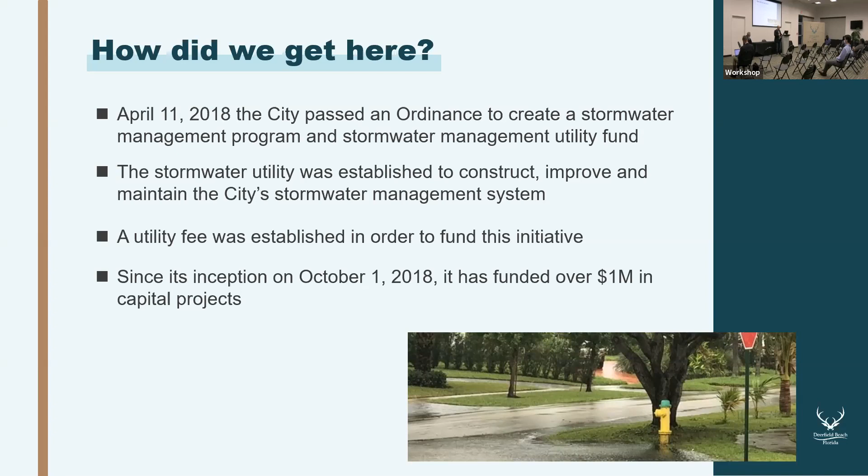The aging infrastructure in Deerfield Beach is not unique. Most of our communities were built 50, 60, 70 years ago, and a lot of that infrastructure is past its lifetime. There's a lot of deferred maintenance out there across South Florida, across the country we hear about. Ultimately, by creating this utility, by creating this plan, it's really a positive step forward for this community in addressing the challenges of making sure the streets and homes are as dry as possible. Since the inception of the fund, there's been over $1 million in capital projects.

So why do you need a plan to begin with?

Well, it's a little like, I guess for those of us who used to print out maps, right? Printing out a map and taking it with you. So ultimately you want to make sure you understand where you want to go as a city. You don't want to build one project that solves one problem when you could potentially build a bigger project that solves multiple problems.

This is one of the benefits of doing this planning process, that we can think through what is the best value for the city and its residents in terms of reducing flooding on roadways and ultimately making sure homes and businesses don't flood.

We talked about the aged and diminished capacity of the system. There are pipes that are smaller than we would hope they would be, and some pipes that are a little older than they ought to be. Ultimately, we want to make sure public health, safety, and welfare are protected, that people are not flooding. This is of utmost importance for the city.

Ultimately, the city is what's called a co-permittee on an MS4 permit. It's a regulatory permit provided by the Department of Environmental Protection under the Clean Water Act, and it allows the city to discharge water from rain in the stormwater system out to our water systems like the Intracoastal and the ocean. So we want to make sure that water is as clean as possible.

That's actually one of the biggest challenges. We'll talk a lot about this. Yes, we talk a lot about flooding, but we're going to talk about water quality as well, because the water quality portions can actually be more complex than solving the flooding issues.

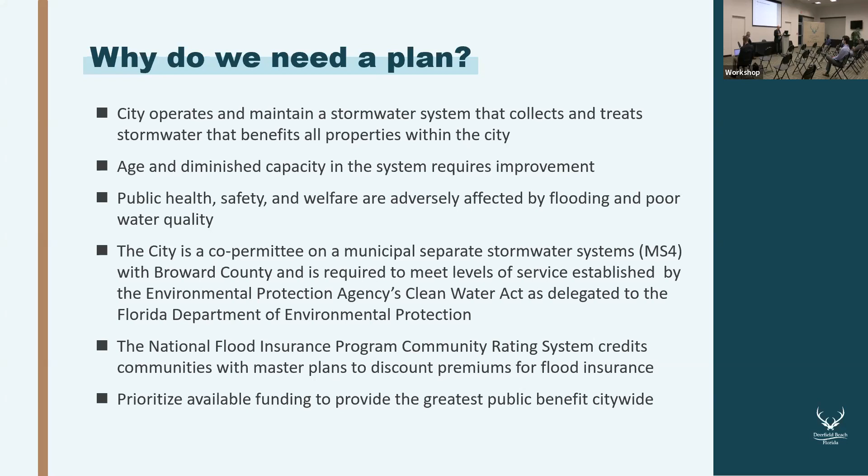And of course, we want to prioritize that available funding to make sure it benefits as many people as possible in the most effective way possible.

So where are we? Well, we talked about the utility already being initiated. This is a great first step. This program is going to fund maintenance personnel, equipment, material, and capital planning and projects. It's dedicated funding just for stormwater.

This master planning effort was started in October of 2019. We saw you all in November of 2020 with our initial public meetings. These are our final meetings to share the results with you.

Ultimately, the city did receive a FEMA Flood Mitigation Assistance Fund, and this is going to help design a critical project in each of the districts. So this is a great step forward.

Today, we're here to receive public input, show the completed plan, almost completed plan, and then we're going to continue to seek grant funds and program improvements.

This is the perfect time to be finishing a stormwater master plan. There's a lot of money available on a state and federal level. So making sure that we leverage that utility money and bring as much money back from the state and federal government as possible. And so it is my pleasure—

I'm going to pass it over to Mark, and he's going to walk through the workshop objectives in a bit more detail on the stormwater master plan.

Yep, and I get to take the mask off here for a little while. So thanks, Alec. What we're here to do is talk about the master plan, give an introduction and overview of what that is, but really talk about the results, what it means to the community, the citizens, and the particular projects that are being programmed.

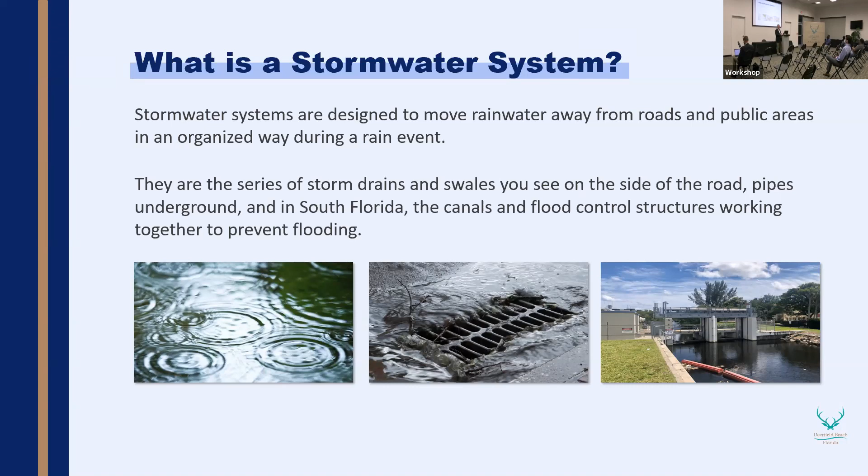So there's a number of things that go into this idea of the stormwater and flood resiliency plan. Flood management, water quality improvement, as was talked about. Now, water quality improvement is interesting. When rain falls, it not only causes issues with flooding, it also can pick up pollutants from the ground, from roads, can pick up oils and metals, even nutrients from fertilizers or other things. And those things can impact the water bodies that they go into. So when we talk about water quality, it's a little more subtle and a little bit more complex, as Alec mentioned, but nevertheless, we need to address it fairly well.

But there's a lot of other elements that work into this idea of the master plan. Sea level rise, there's projections for the sea level to rise. And when that happens, the tailwater rises. And so these outfalls that have the water that's trying to get out to the Intracoastal or the Hillsboro River, it's more constrained, has to fight harder to get out.

Information is important, like topography, the elevations of the land surface that impact the way stormwater runs off in the areas. Other factors that we look at are things like land use. Different types of land uses respond differently to rainstorms. The completely paved shopping center is going to generate a lot more runoff from that rainstorm than a park that's completely pervious. Floodplains are an issue. There's a lot of floodplains delineated in this city, as there are many coastal areas, and a number of regulations and other environmental issues that are all kind of wrapped in together into this plan.

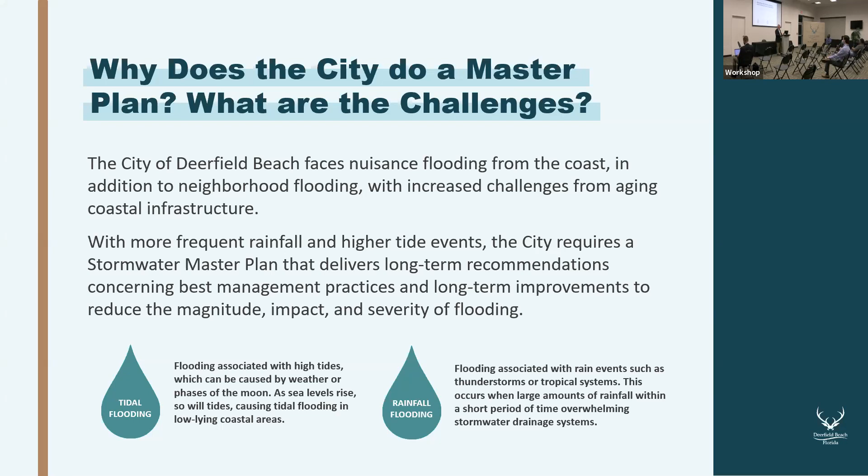So now we're going to talk in a bit, get into the plan. We're going to give an introduction. Now, the idea of a plan is to have this roadmap of the future. The city needs to know how to maintain its system, how to do projects, do activities, do maintenance and operations to be able to be proactive in the way they maintain the system moving forward in the future. And this plan provides that. It looks at the flooding, it looks at the water quality, it looks at the coastal resources, and identifies problems, not only based on what we knew in the past, but also present, and then what may happen in the future. And in this way, it can focus on developing a program of capital improvements, projects, or programs, or other measures to be able to make things better and have the stormwater be managed better for the benefit of the citizens in the city.

So I'm going to step through, there's really five main elements that I cover with the master plan, and talk a little bit more in detail and give you a sense of what we looked at, the data we had to use, and how we're using that to move forward. First is the flooding assessment. And this is the thing, as we talk about, everybody really sees every day. Actually, this morning there's a heavy rainstorm, and if you're driving around this morning, I saw a lot of puddles and a lot of little areas where the rainwater is accumulating as it's working its way through the system. So when we look at the flooding assessment, we start to look at both past, the present, and the future.

In the past, we compile a record of complaints, areas where citizens have called in and said there's flooding on my property or down the street, or I had to drive through to go to work. We compile all the data for the last several years. In addition, there are flooding complaint areas that the county or city knows are chronic areas they have to respond to quite a bit. That's pulled together into problem areas.

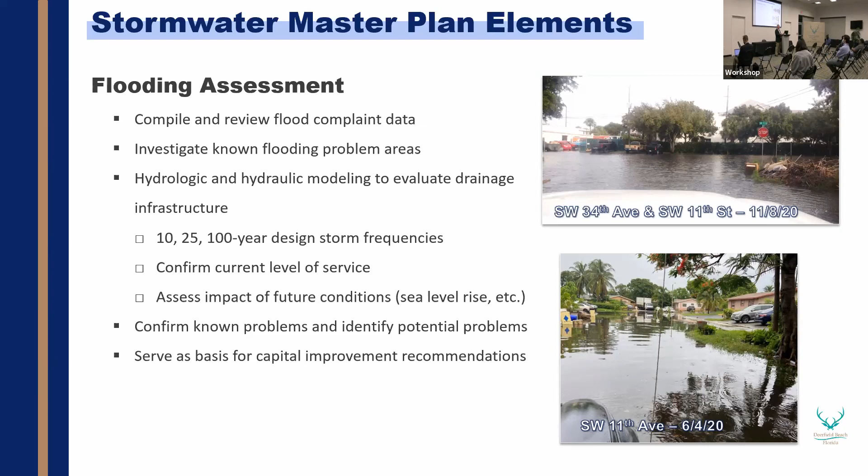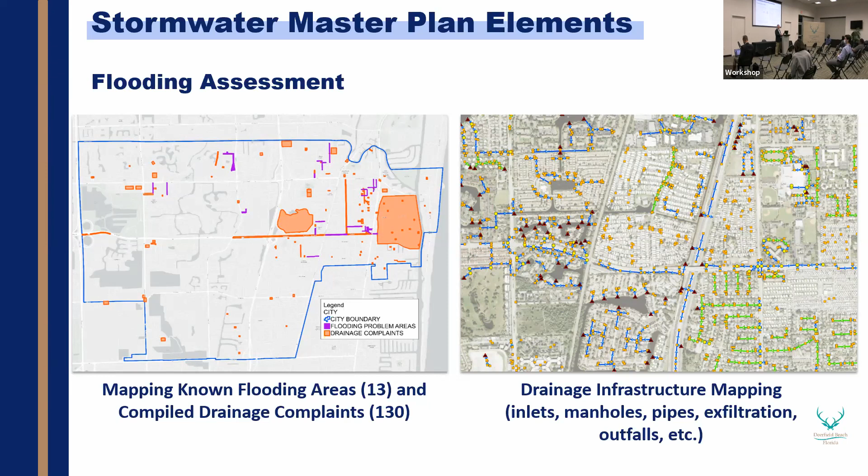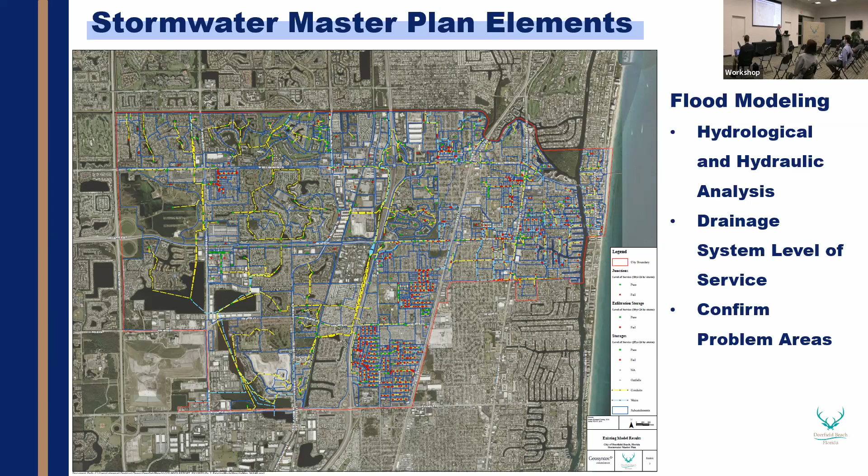Now, next, in addition to flooding, water quality assessment was a big area we looked at. Really what we're looking at here is there's a lot of regulations the city is going to need to comply with, through either their NPDES permit, which is a state permit, or water quality regulations that are coming up. It's important because most of the city, I think all of it, drains either to the Hillsboro River to the north, the Intracoastal to the east, or through the Broward Water Control District and some of the lakes to the south and southwest. It's important that water quality be maintained for recreation purposes and for the health of the environment. Stormwater can be a big contributor to water quality issues.

So looking for areas, looking for hot spots, similar to what we did with flooding, looking for opportunities to do some projects or programmatic things to help water quality is an important part. Again, these work into developing recommendations as part of the capital improvement program of projects.

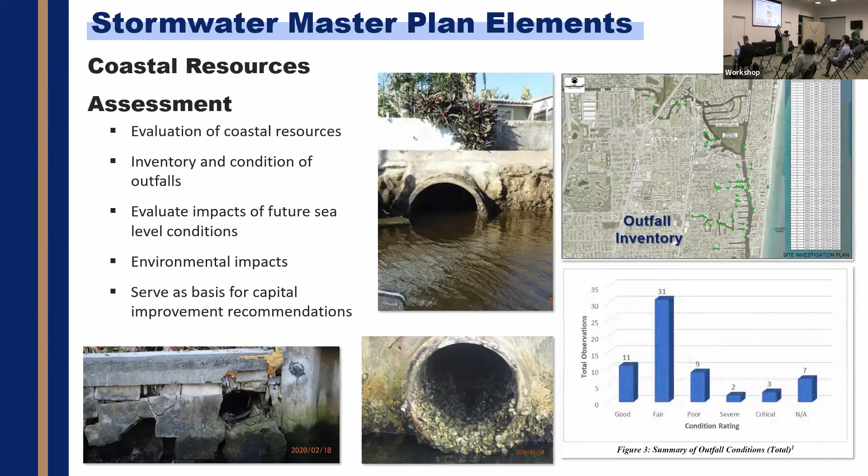Now, another area that we look at is regulatory compliance. As we alluded to before, there's regulatory compliance the city is responsible for, some state permits, their NPDES permit, which, as Alec mentioned, permits the city to discharge to receiving waters, but has a lot of requirements on how they need to maintain their stormwater system in order to do that responsibly for both flood control and water quality. There's also some state regulations with water quality that need to be met. So this is an opportunity to look at those requirements and look for opportunities for enhancement or recommendations.

We also looked at the local code, the comprehensive plan, code of ordinances, and the land development code, to look at areas where we could recommend some enhancements, some things that we learned from around the state and different stormwater master plans, to again help enhance stormwater and make the program more effective.

We also look at floodplain management and how that works. There's a Community Rating System that, depending on how robust the program is, you can get increases in floodplain insurance discounts, and doing a master plan is a big part of being able to get more credit through that. So this regulatory compliance review is an important aspect, and behind-the-scenes recommendations go forward.

The last big area is really operations and maintenance. The city has to maintain all this infrastructure, and it takes significant personnel and equipment resources to do that.

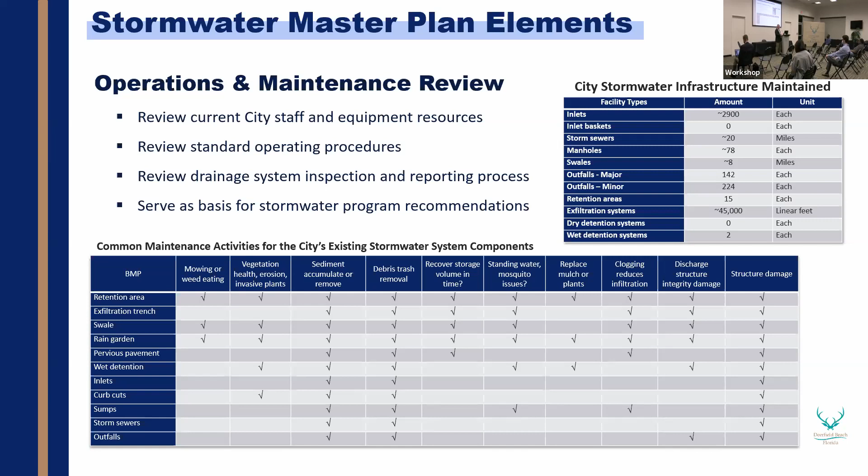Now, all these things together are leading to capital project recommendations and the to-do list, the roadmap for the future, 10 years of the stormwater program. Some of these projects are defined enough to go directly to turning dirt, so to speak—go out there, go right to design, improve something, start constructing. Other areas are less defined, where we recommend some studies to look at the most cost-effective way to approach fixing some problems.

There's also some citywide recommendations for looking into some things, but all these work together in a program of capital project recommendations. Right now, as it sits with the draft master plan submitted, there's a total of nearly $19 million of needs that we've identified for the program.

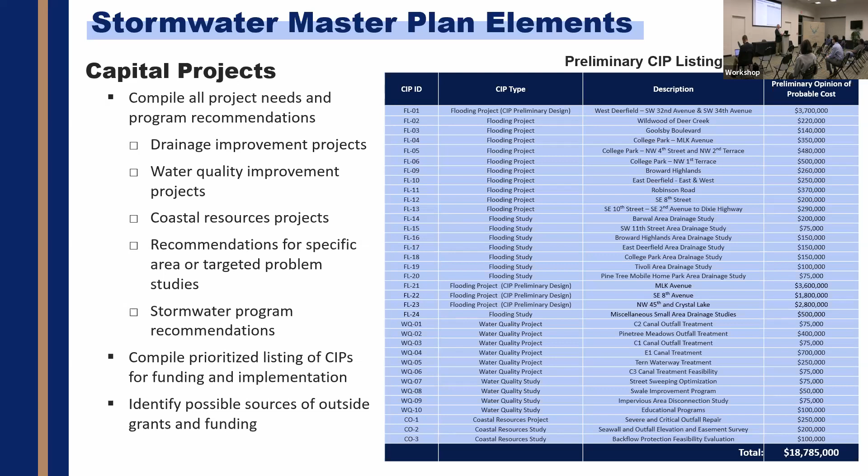Now, what we do through this process is not only identify the projects and figure out how they're going to cost and where they're at, but we also develop a plan. This is kind of the takeaway of the master plan—looking at a 10-year planning period and seeing how these lay out in the future.

We try to prioritize the projects based on different criteria. Looking at flooding, a lot of the criteria are: have houses flooded? How many people may be impacted or benefit from a particular project moving forward? Those kinds of things factor into how successful a project is in reducing flooding.

Water quality is a little more tricky, but it's the same kind of thing—how much benefit can we provide to water quality for a particular project? Ones with high benefit may be prioritized a little higher.

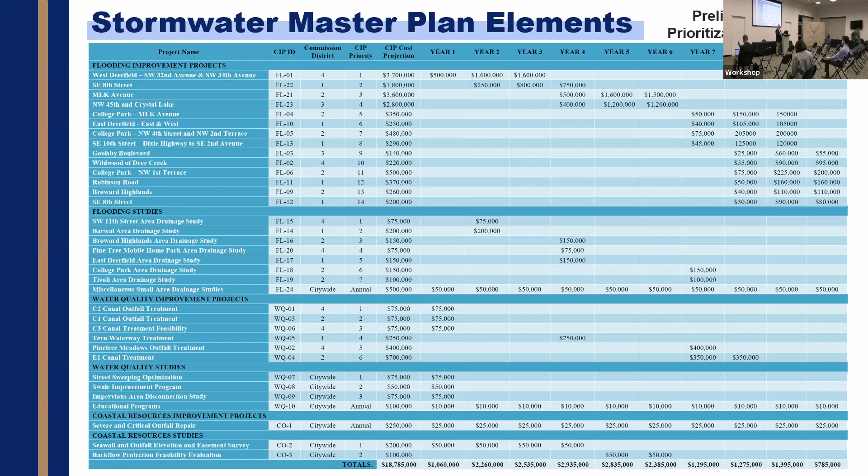But all this is laid out in a prioritized manner to provide this roadmap. One thing we do realize is the master plan is a living document—things come up, priorities change over the years, and 10 years is a long way to look out. So it's expected there could be, for various reasons, some adjustment in this priority, but you need somewhere to start that roadmap to be able to go down the road.

Now, as was talked about originally, the city was fortunate enough to be the beneficiary of some FEMA flood mitigation grant funding. What that turned into is the opportunity to do, in 4 areas—1 project per district—take the idea of a capital project to the next level, not only having it planned as a concept in this master plan, but taking it to what we call a 30% design level, which involves getting actual information on plans and doing calculations to see how these work.

So here on this map shows the 4 projects, 1 per district, that were recipients of this funding, allowing them to go ahead and take the next level, even as we're finishing the master plan now.

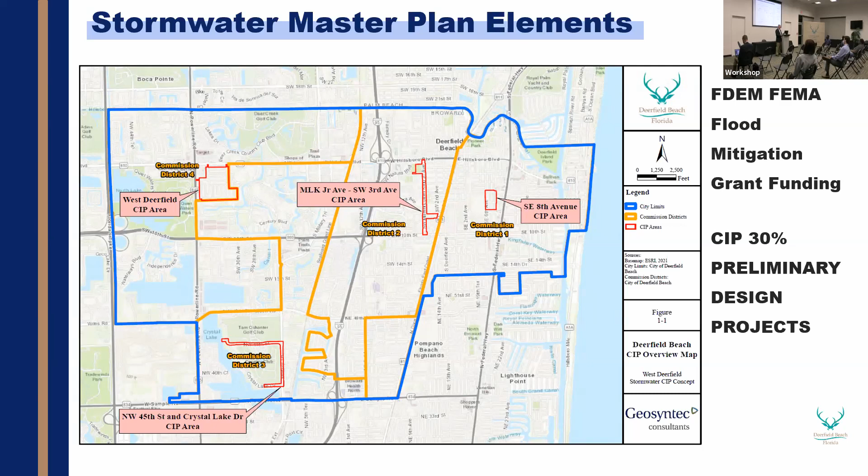Over time, this has kind of grown together, but what happened is there's still insufficient infrastructure along MLK to effectively convey the water to where it needs to go, keep it out of the streets, and keep things safe. The Stanley Terrace housing area in particular has a history of some chronic issues.

In addition to looking at the MLK corridor, we want to connect the dots with more drainage along the street by Stanley Terrace and by the park, to improve the drainage and get it to where it goes more effectively. The park itself has a large pond and some conveyance infrastructure for stormwater that can be expanded to help provide an outfall for some of this.

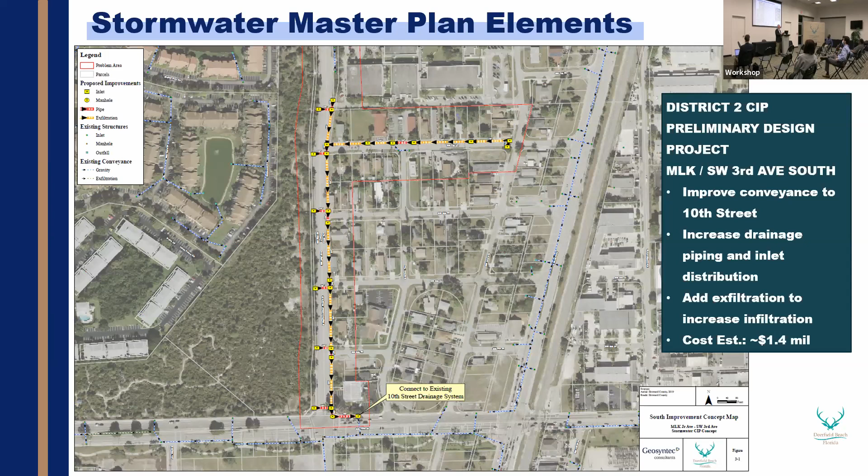Now, the southern half of MLK, we're also looking at some improvements. Here at the bottom is 10th Street, and then you have the elementary school right on MLK up there. There are some areas that just lack infrastructure - not a lot of pipes, not a lot of inlets going on. So you have a lot of puddling on the side of the road.

In fact, on the street you see, the lateral going across on the top, there are some low areas. There is some piping and stuff, but it just doesn't drain effectively. So this is part of an issue where there's a lack of drainage infrastructure, and also some that is actually under capacity. We're looking at trying to tie this together.

The natural outfall is to try to get down to 10th Street into the system down there. So again, we're looking at connecting the dots with some inlets and some piping. A lot of this piping, again, using exfiltration, allows some infiltration to happen when it's going to its outfall.

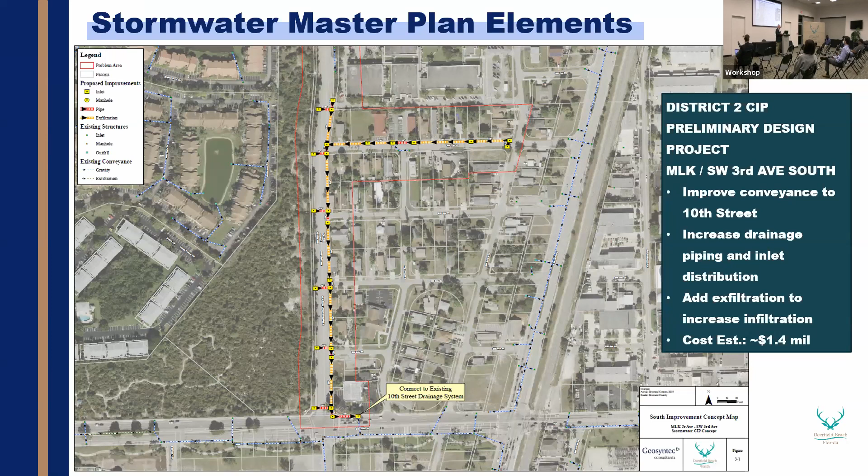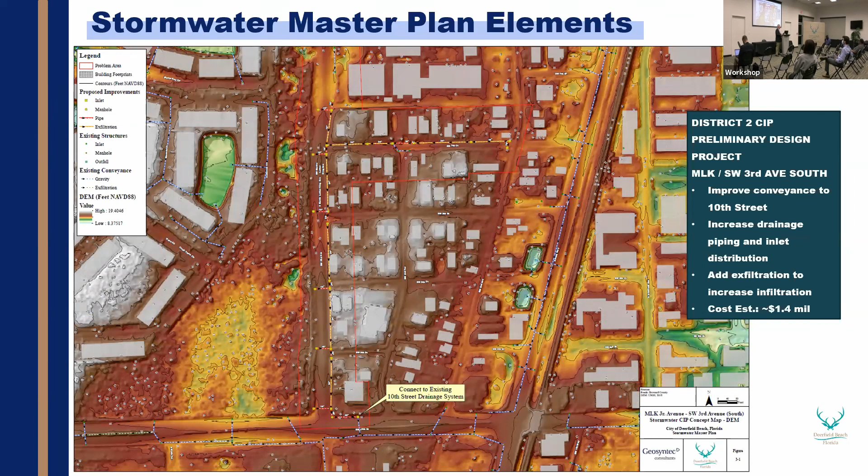Now here, this again is the topographical map. You see a lot of the same colors in and around the streets - that's just indicating that it's fairly flat, very consistent. So the water isn't naturally flowing downhill very well. That's where putting in more pipes and inlets to be able to get it off the streets into the system will help to manage the stormwater more effectively.

So that is the project for this district that is proposed to really focus on not only the MLK corridor, but making the peripheral streets more effective as far as drainage as well.

Now that brings us to wrap up the presentation. So what are the next steps? We're going to finalize the master plan. An important part of these last steps is having four final public meetings to get input, because there's always good opportunities to get input. Some of that can be reflected in the final master plan, and then at the end we'll go to a final meeting with the commissioners to present the master plan.

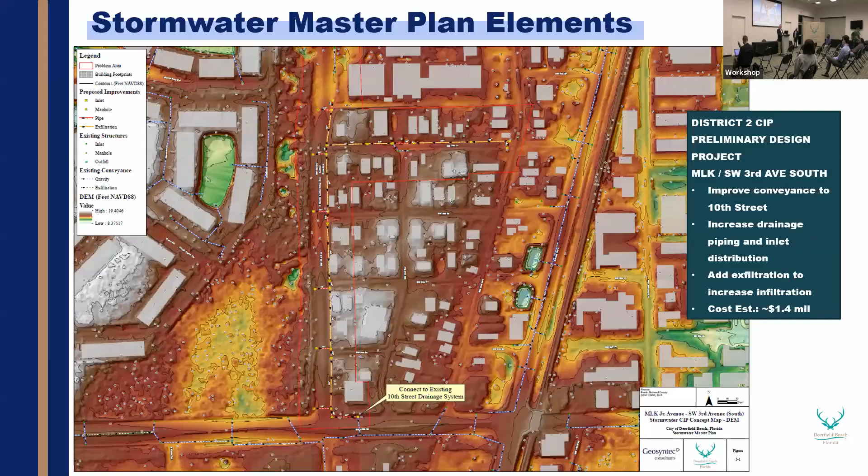Yes, we can pull up a map. If you don't mind pulling up the District 2 map, we can show that our hydraulic modeling shows a red dot in those areas where we know the system is not functioning—Allwood Estates. Can you give me the cross street? We can zoom in—that's Third along with Fifth Northwest. Yeah, that area is shown as an area of high concern. And Allwood and College Park, I'm not quite sure where the dividing line is, but College Park is an area we have as a real high priority for the city. That's Hillsboro—the crossroad of Hillsboro. Yeah, north of Hillsboro, yes.

Right, so those two areas are high concern volume areas. Is that correct? Yes, sir. Those are on our priority list.

Okay, now I heard you say that you're seeking grant money for MLK. That one has already received design funds, which positions us well to get construction funds. Upon completion of the study, we submit that to FEMA, and FEMA, having funded the design, is likely to fund the construction element. We follow the process with the federal government, and we think we're well positioned to receive construction funds for these projects.

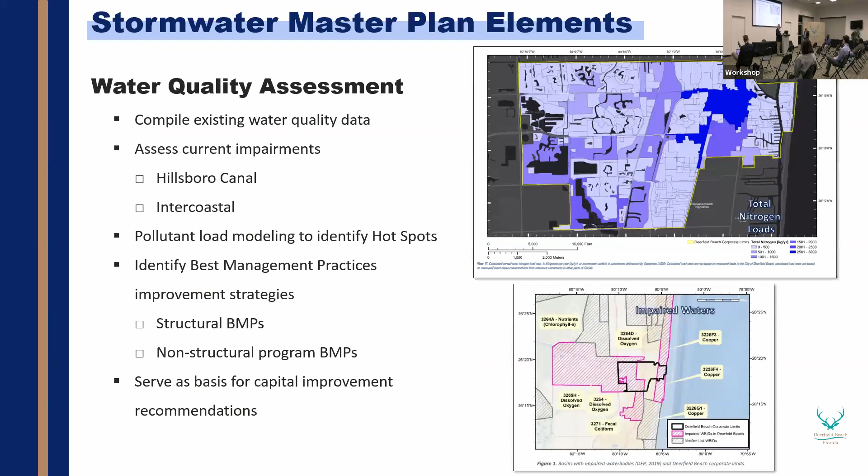So is that in addition to the $6 million plus that is already allocated for the District 2 area? I'm not familiar with the $6 million allocation. I've seen that dollar amount on one of your slides.

Okay, now in addition to that, will you be asking FEMA for more money? Because we're already getting funds under the stormwater program, and I don't know how much has already been allocated within the new budget for stormwater. Can you let us know that, please?

Yes, sir. The capital budget is published. The draft version of the FY22 capital budget is published under the Finance Department's website. If you go to the Stormwater Fund, you can see all the details. We receive approximately $2 million annually from the stormwater utility.

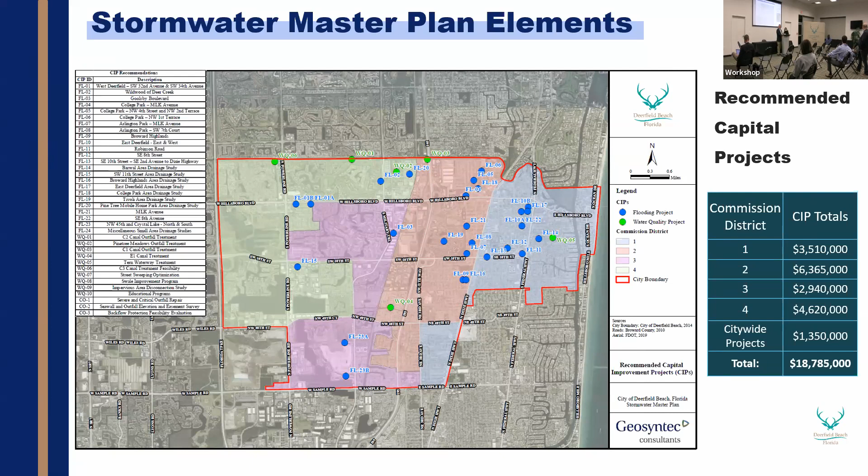People are flooding out. My neighbor was laughing at Mr. Preston because he bought a higher truck so he could get through the water, since he lived right around the corner. But you get a lot of promises, and over time, like she just said, the same thing happens over and over.

They put a drain system down there about 20 years ago, and it doesn't flow anywhere - it's just a cistern type, it just goes into it. But I was told at the time this thing would last maybe 7 to 10 years and the city would come in and repipe it, route it somewhere. Nothing has happened.

They used to come down with a truck every once in a while to suck out all the sludge and grass clippings that blow into the road and flow down there. There are 3 drains right on the corner.

That's how bad it was on the corner where I live, right at 14th and 14th Place and 6th Avenue. This thing is constant, you can't keep your grass up because the water washes your soil away. You can't do nothing, really.